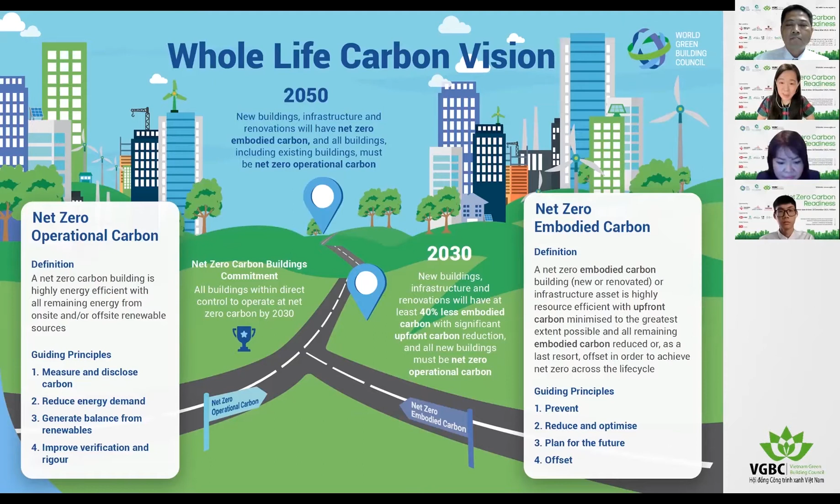We always knew that scientists told us this is not enough. That's why, this year around September, World Green Building Council published an enhanced commitment pathway by expanding its scope to recognize enhanced leadership action in tackling both operational carbon and embodied carbon emissions from the building and construction sector. In this new commitment signatory, we are requesting leading companies to commit to both operational carbon and embodied carbon as well, adding another layer of challenge to the industry.

We're also emphasizing that carbon offset should only be a last resort. You may take a moment to scan this QR code, which links to more information so you can consider whether your company is ready, or considering doing this pledge and becoming part of this global movement. By committing to this commitment signatory, your organization will also be recognized as a front runner under the global movement right after COP26.

There is a lot of recognition, and at the same time you will be exposed to all the global resources to guide you on how to achieve net zero and how we are able to support you further. In the next slide, we will see some interesting numbers. I'm very sure that after today's webinar, this number will start to grow.

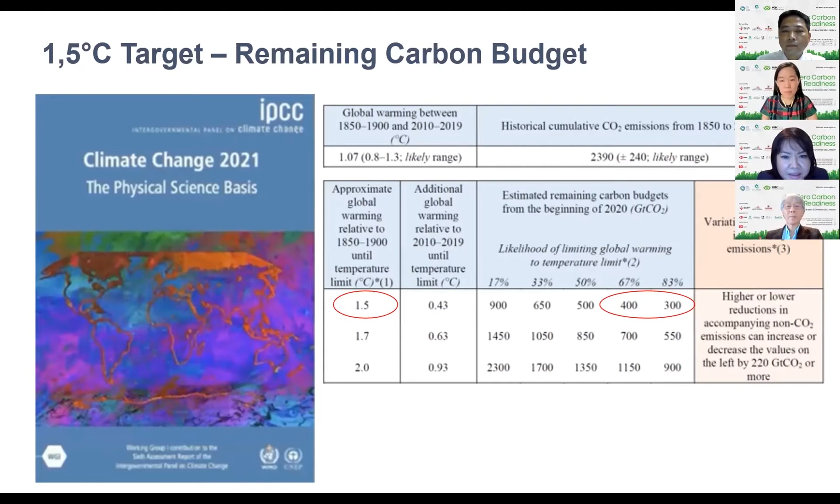Within this global picture, our construction sector's contribution comes from two parts: building operations, which are responsible for about 28% of the annual carbon emissions, and building material and construction, typically referred to as embodied carbon, which comes from manufacturing and processing of building materials and construction, contributing up to 11%. So the total, 28 plus 11%, means we contribute close to 40% of annual global CO2 emissions.

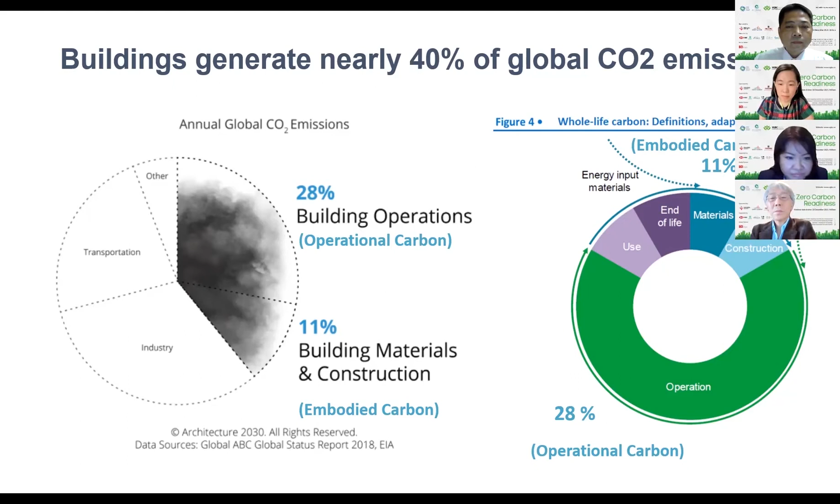As mentioned earlier, whole life carbon is described as operational and embodied carbon, and for the building sector to play a major role in supporting decarbonization, we need to address the whole life cycle impact of a building. A whole life net zero carbon emission building is therefore one whose carbon emissions from materials used, or embodied carbon, as well as operational carbon emissions, are offset. So what actions in particular can we do to offset these emissions? I will discuss in the next slide.

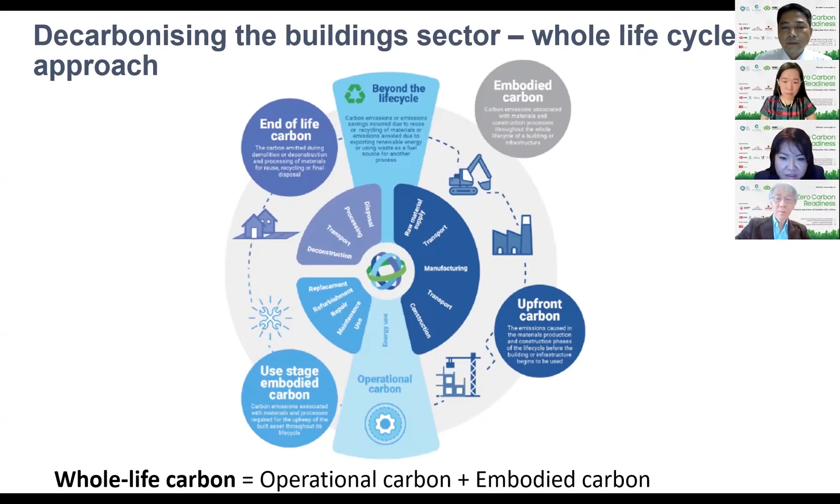For the operational stage, which is responsible for two-thirds of the sector's emissions, the definition of net zero implies a strong effort to increase energy efficiency first. Energy efficiency is the core driver to reduce operational emissions. A strategy to enhance energy efficiency is optimizing the building's thermal envelope so that heating and cooling energy can be reduced. This includes deep renovation for existing buildings, like adding more insulation to reduce energy consumption, or for new buildings, starting with design considerations for better design.

Secondly, electrification, which means no fossil fuel on site. It's not only climate friendly, but also healthier for occupants, safer, and cheaper. And thirdly, renewable energy - switching to renewable energy such as solar or wind energy. In the case of Vietnam, quite interestingly, in 2017 solar energy played almost no part in Vietnam's energy strategy. But by the end of 2019, Vietnam had surpassed Malaysia and Thailand to reach the largest installed capacity of solar panels in Southeast Asia. And after the commitment of our Prime Minister at COP26, we are seeing the race to wind energy starting to pick up. So hopefully we will have more supply of renewable resources in the future.

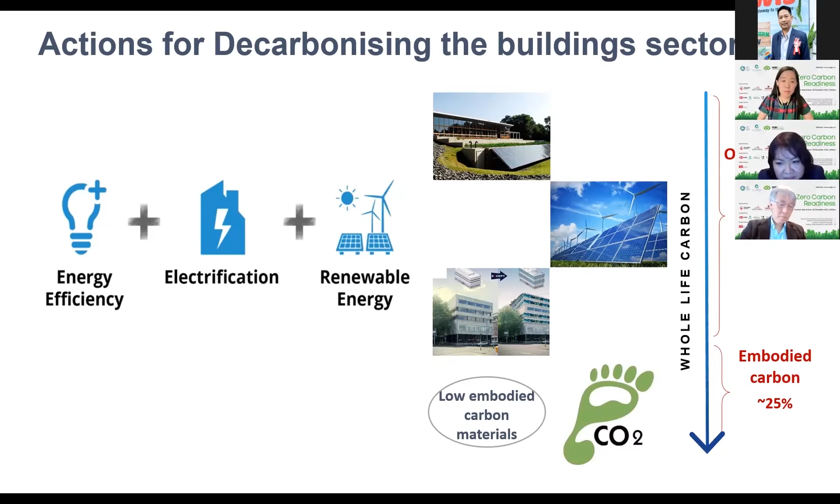So when we act on the whole life cycle of a building in two dimensions, operational carbon and embodied carbon, we could achieve full decarbonization of the sector. And of course, to do so, we need to start with transparency of data collection, increase data collection, disclosure of building performance, and then gradually apply the use of building labels and standards.

So for different types of buildings, there are several groups of actions recommended for existing buildings in order to reduce operational carbon emissions. Renovation is key, critical. So like I mentioned earlier, we need to enhance the building envelope, and thermal insulation will be crucial.

Prioritize preserving or extending lifetime by ensuring improved repair and refurbishment. Thirdly, increase the intensity of use of the building, meaning increase occupancy or utilization rate. We already see emerging sharing economy models like shared offices or Airbnb developing in this direction.

For new buildings, we can start with setting minimal energy efficiency and thermal performance requirements. In Vietnam, QCVN 09 stipulates the requirement for energy efficiency of buildings, encouraging them to perform better than the baseline. For new buildings, we can also start with design considerations like facade orientation, natural ventilation, green roofs, and other passive design schemes to reduce heating and cooling energy.

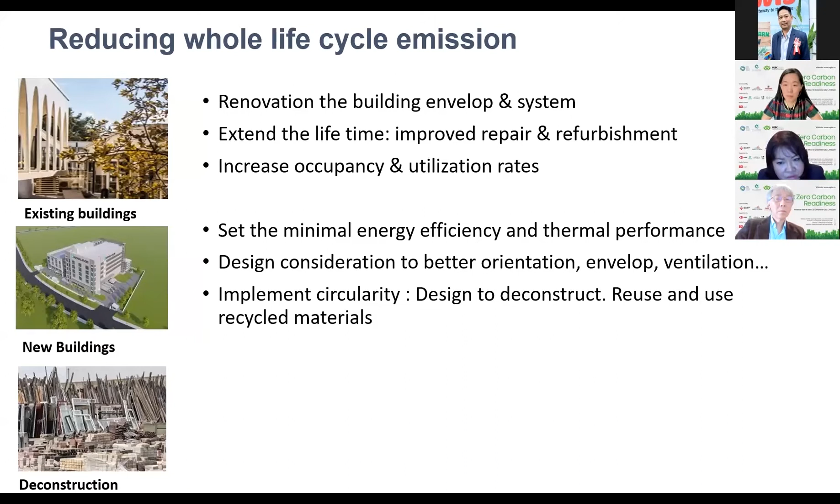To do so, a holistic approach from the early stage is important, with the mindset from the design stage: design to deconstruct, design to dismantle. If we can do so at the deconstruction stage, waste becomes a secondary resource. Circularity becomes a business model, and waste recycling service can be a business opportunity. This model requires consideration from the design stage—design to deconstruct or dismantle for reuse.

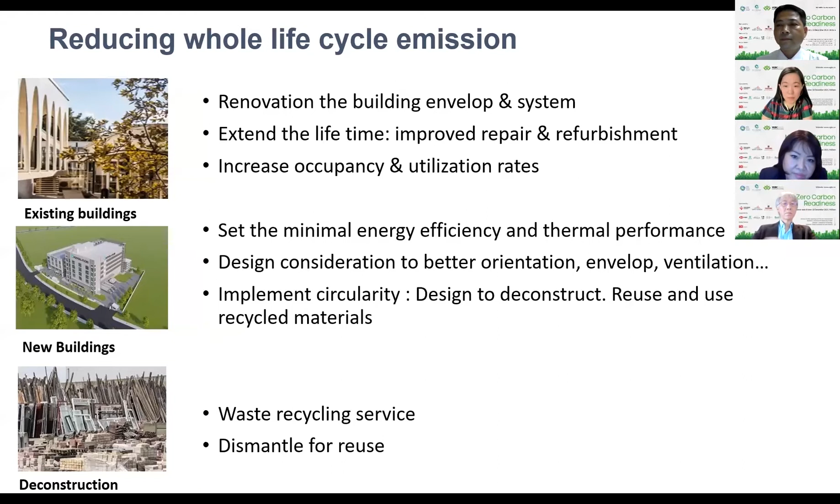So these are the groups of actions we recommend for each type of building state.

To talk about the legal framework, I want to share that in Vietnam we already have an existing legal framework, already integrated with energy efficiency aspects and ready for further improvement.

In March 2021, our Prime Minister issued a decision stipulating requirements for energy efficiency buildings. From June 2021, the Ministry of Construction issued the revised construction law, which encourages buildings to operate in energy efficiency mode and introduces an energy efficiency rating for building operation. This rating system is really on par with European countries, so I'm very happy to see this movement from the government.

Since we're talking about government legal framework and activities, I want to share updated results of the project on energy efficiency improvement in commercial and high-rise residential buildings in Vietnam. This project's executing partner is the Ministry of Construction, sponsored by UNDP, with a duration from 2016 to 2021, just finished last year.

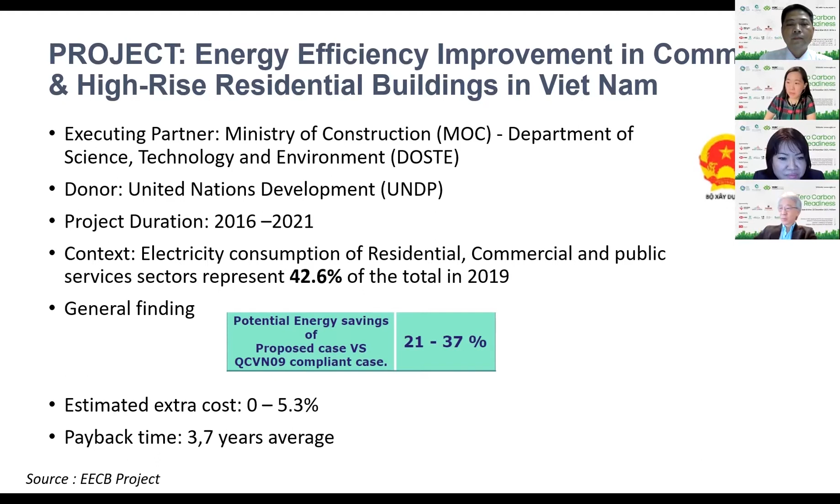The findings also show a lack of prerequisite input for the development of building energy efficiency in Vietnam. This can be addressed by the local green building scheme, as in my next slide.

As introduced earlier, Lotus is the voluntary green building scheme for Vietnam, developed by VGBC. Lotus has 8 categories, in which the energy category accounts for 32 points, or 32% of total score. Our approach focuses heavily on energy efficiency, requiring projects to comply with all mandatory requirements included in QCVN09. Lotus is also the only green scheme in Vietnam that is deeply integrated with Vietnam's building regulations.

The prerequisites for Lotus projects include measuring total building energy use, designing through passive design, and demonstrating energy efficiency of minimum 10% improvement from the baseline. From there, an additional 1 point is given for every 2.5% reduction of energy use from the baseline, up to 45% improvement, which can gain a total of 14 points.

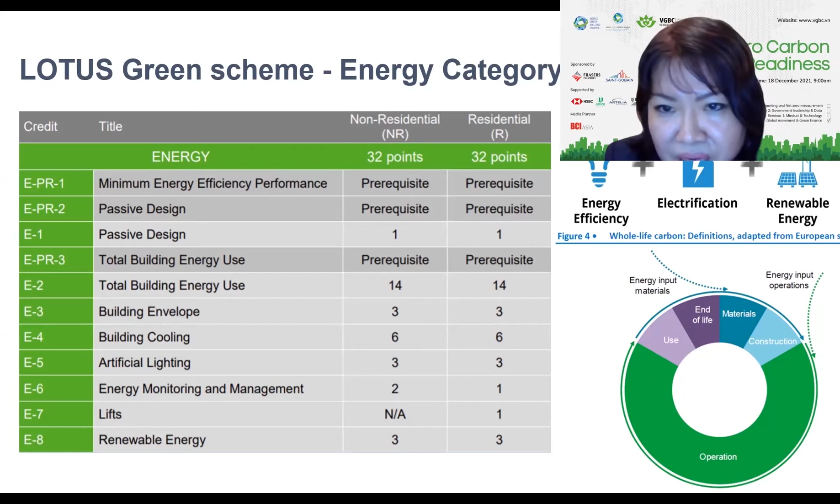And beside that, there's an additional point for other credit like building envelope, ventilation, air conditioning and interior lighting, etc. Last but not least is points for renewable energy, up to 3 points. So we can see very clearly that the point system in Lotus energy credit covers all 3 key actions in operational carbon, which are energy efficiency, electrification, and renewable energy.

Next, please. So talk about material and embodied carbon. The material and resource category of Lotus includes 3 main goals: first is to reduce the amount of virgin natural resources, second is to promote the use of low embodied material, and third is to reduce the amount of waste generated. To achieve these goals, credit within this category encourages the reuse and recycling of building material from sustainable sources, and unbaked material. For example, Vietnam has a regulation to use lightweight material to replace burnt brick.

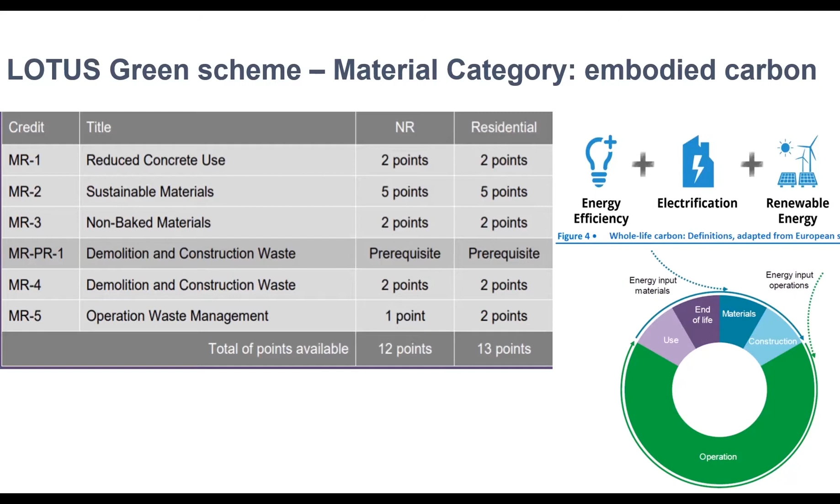Next, please. So here is a case study of environmental impact of one Lotus platinum project. This is the Green One UN house. This project has 77% of landscape area that limits the heat island effect, and 35% of total green roof.

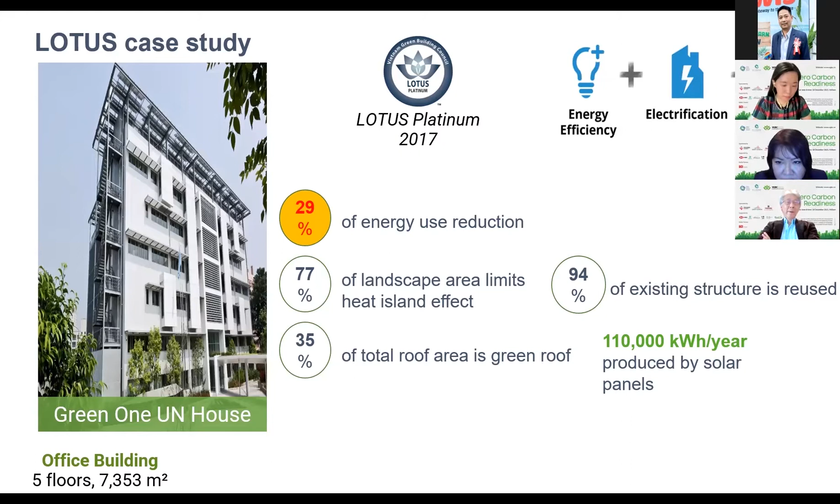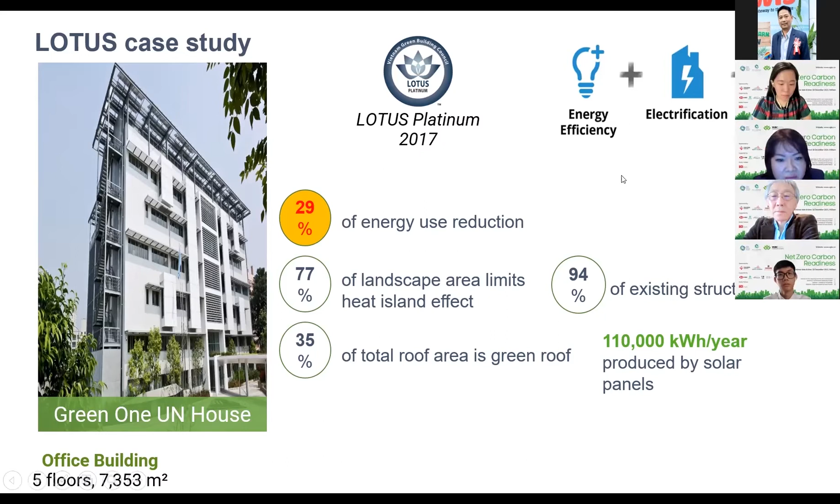And beside the choice of MEP system, those design features contribute up to the reduction of 29% of energy use for the building per year. And beside that, for the embodied carbon, they use 94% of the existing structure as reused material to reduce the embodied carbon.

So to summarize, to achieve the global warming limit of 1.5 degrees above the pre-industrial level, we will need to cut down our carbon emissions by half by 2030 and continue on the progress to maintain our carbon emission budget within the limit of 400 gigatons. And in this global picture, our building sector contributes close to 40% of emissions that come from two parts, the embodied and operational carbon.

And we need to address the whole life cycle impact of a building to address the decarbonization target. There are three groups of actions that allow us to do so, which are energy efficiency, electrification, and renewable energy, in which energy efficiency is the starting point and can save up to 37% of energy use. And Vietnam already has mandatory regulation in this regard. Applying green building schemes like Lotus will help all stakeholders from the early design stage to consider the right strategy from the beginning and have a holistic approach to decarbonize their building.

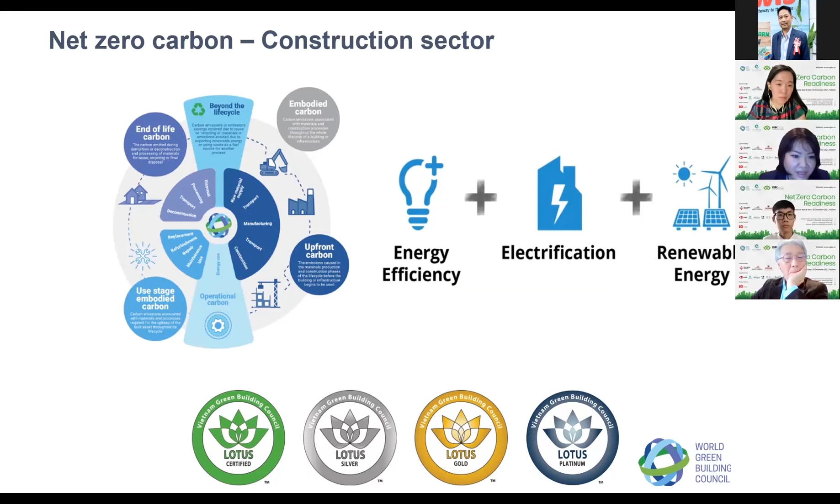Next slide, please. So that's it from me, and please join us in creating green buildings for everyone, everywhere. Thank you.

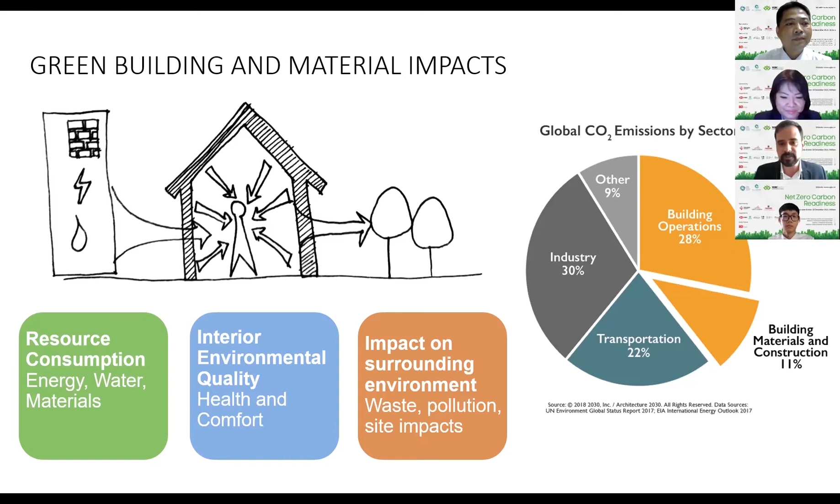Ms. Hang also mentioned about the contribution of buildings to global CO2 emissions, but I just wanted to mention that green building is not only about decarbonization. Decarbonization fits into the goal of reducing impacts from resource consumption, but green building is also about interior environmental quality and how buildings interact and impact on the surrounding environment. So while we will be focusing on resource consumption, it's important to note, as Mr. Carrie Chen also mentioned, that there are other goals we need to balance in the building sector for green building as we embark on this journey.

Ms. Hang also mentioned about the various types of building that Lotus can apply to. We are focusing on new construction in particular now, but I wanted to point out that for interior projects and buildings in operation as well, Lotus has tools to assess how green these types of projects are, existing buildings and interiors. These are also important parts of the decarbonization goal, but today we'll focus on new construction.

This is similar to what Ms. Hang said, but energy is the most point-heavy category and most important category in Lotus at this stage. I want to show you how we look at energy and materials and resources in a Lotus project.

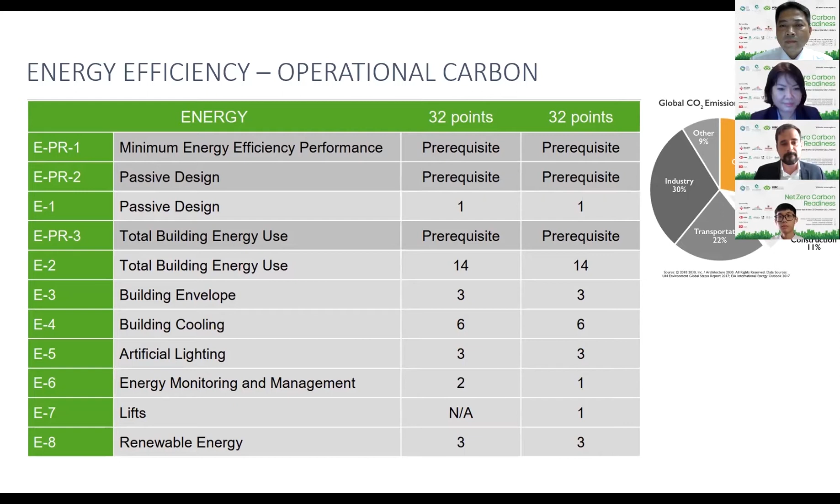Lotus also has an exceptional performance category, which allows for innovative ideas and strategies to be applied to projects which may not be well known yet, and it's also open to giving points for that.

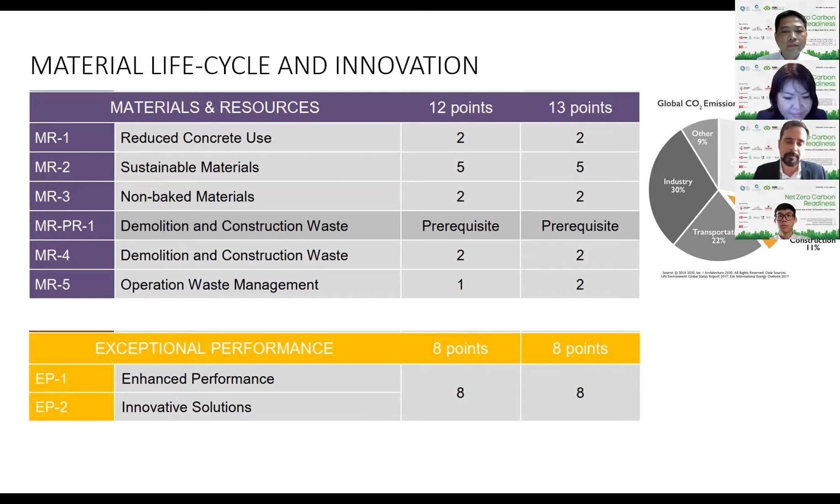I want to have a look at four main tools that we have available already that Lotus encourages us to look at as we approach a building project and work on making it green. These we can apply in Vietnam already, and I think Lotus is a good way to be guided through the process to decarbonize a project by using tools such as this.

The first is integrated design. Integrated design is about getting together all parties from the project team early on in the design stage. This may seem like an obvious approach, but too often in building projects, the project is run by one party and doesn't benefit from synergies by getting different professionals and stakeholders in the project to sit down, share the same goals about sustainability, and look at how they can work together to achieve those goals in terms of building performance and other green building goals. This is a process that can really bring significant benefits through a design process in achieving green building.

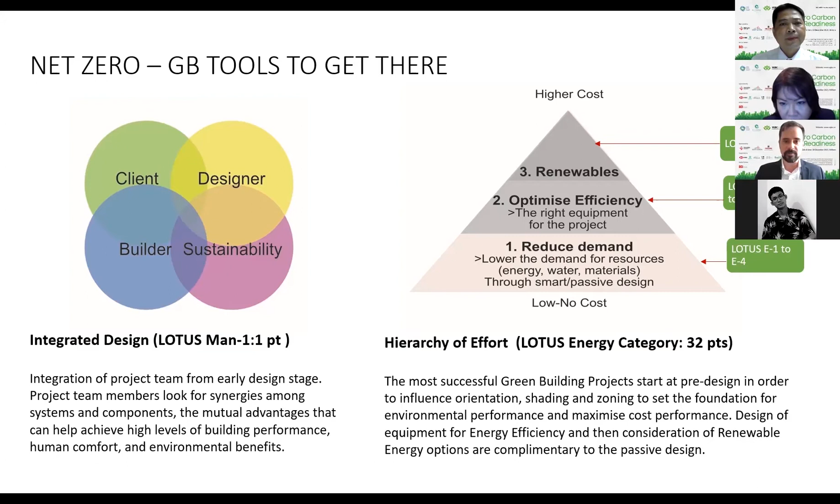When we look through a project by these steps, we can find solutions that won't increase the construction cost too much and also bring the best results in terms of a green building project.

In terms of more technical tools, I think energy simulation is a great tool that we have available. In Vietnam, we have quite a few professionals now using this in the green building consulting sector. Software-based energy simulation allows us, at the design stage, to predict the energy consumption of the project, and it can do this quite accurately as long as inputs are reasonably known.

By using this software, we can compare different options at a very early stage in design and get a good indication of which energy efficiency strategies are going to give the best impact, and even compare the cost of these in order to optimize the results before construction even begins. I think this tool is very helpful for a project owner to understand, before the building comes to be, what the energy consumption and operational energy are going to look like.

The fourth tool is software-based whole building lifecycle analysis. This ties into the materials and resources category that Ms. Hung mentioned in Lotus, but it can also be awarded an innovation point since it's not in the Lotus tool yet. These tools are available for Vietnam, and we are seeing some consultants start to use them, and we are starting to use them in our consulting as well.

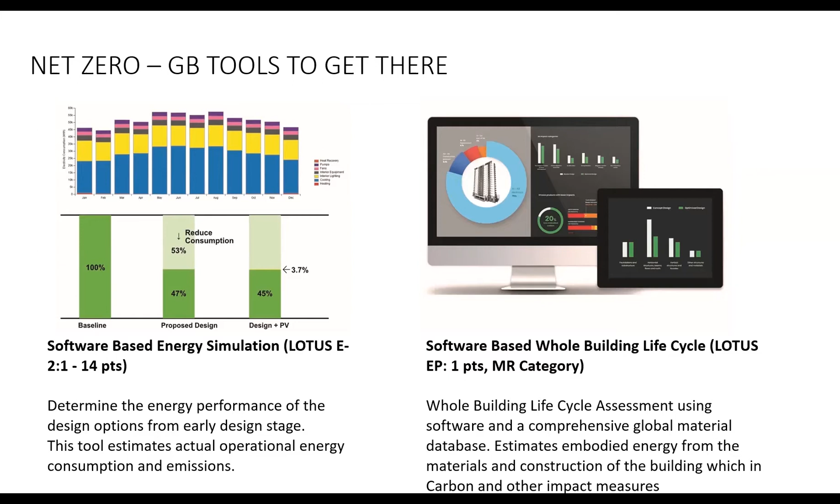With quite comprehensive global databases of materials and a software system, we are able to estimate and compare options for different structural and material strategies for projects, taking into account the carbon at each stage of the life cycle of the material, but also of the building as well. This is something that's starting to gain traction in other countries around the world, and I think in Vietnam, as we improve our energy efficiency, we'll start to look more at whole building life cycle through software such as these.

Yeah, next slide, please.

There's one software called One-Click LCA, which has a tool called Planetary, and VGBC is actually partnering with Planetary. One-Click LCA has offered this tool, which is like a basic embodied carbon assessment tool, and it's free for use. You can find it from the One-Click LCA platform or even from the VGBC website. So we can see that we're starting to move towards looking at embodied carbon even in Vietnam.

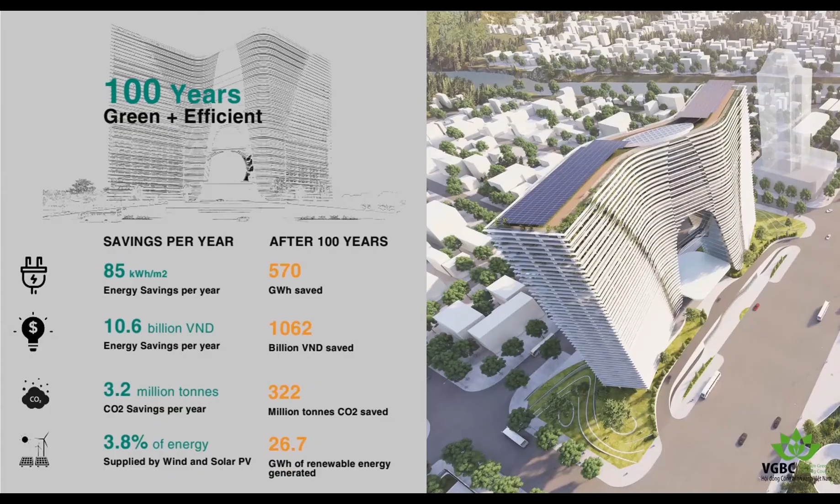The site for this project is a long, narrow site facing a river, and the orientation is probably one of the worst we could have for starting a green building project. North is straight up for this project, and once you apply the required setbacks for this site and the construction area and the GFA, there's not much room to move in terms of the building shape. So we looked at the OTTV credit in Lotus.

We had a look at if we just made a basic volume for the building, what would be the overall thermal transfer for different options, and we tried to adjust them and check the Lotus result to see what would be the best footprint and volume for the building. If we just did a straight block building facing east-west, the OTTV there's actually a 23% increase above the baseline. As we started to twist the building a little bit, we could improve, and by trying to avoid direct east-west facing facades, we were able to reduce the thermal transfer—the heat gain from direct solar radiation—by 7% according to Lotus, before applying shading. So that was the first step for this project. Next slide, please.

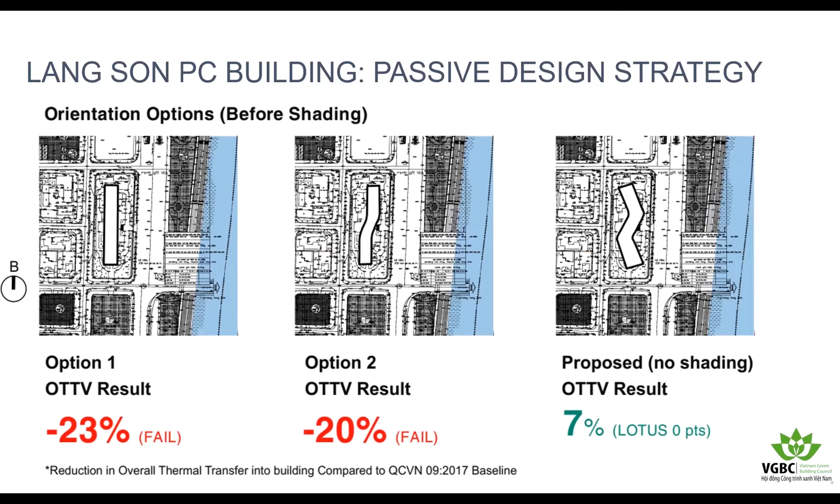Next, we look at the shading strategy, also based on Lotus OTTV methodology. We could see that by applying shading on northwest to northeast or southeast, southwest facing facades, we could reduce solar radiation by quite a lot.

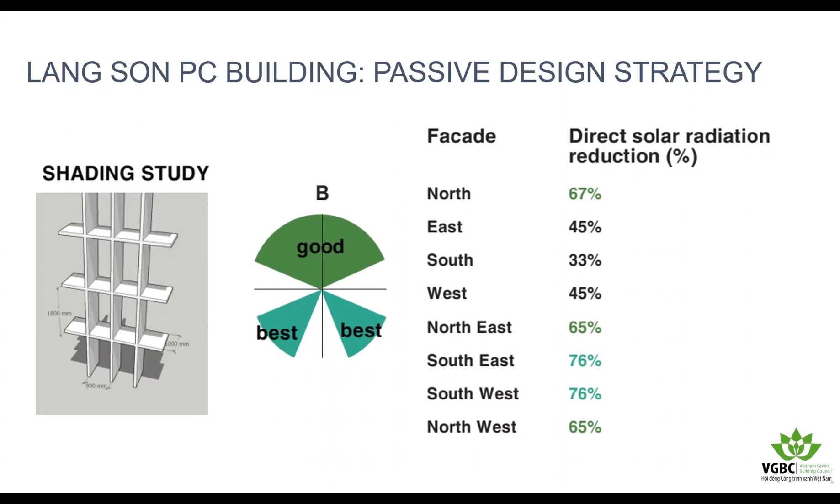In applying this, we were able to improve the OTTV reduction result in Lotus, which is an indication of the reduction of the solar heat gain, the direct solar radiation, by 48%, which is the maximum point in that credit for Lotus.

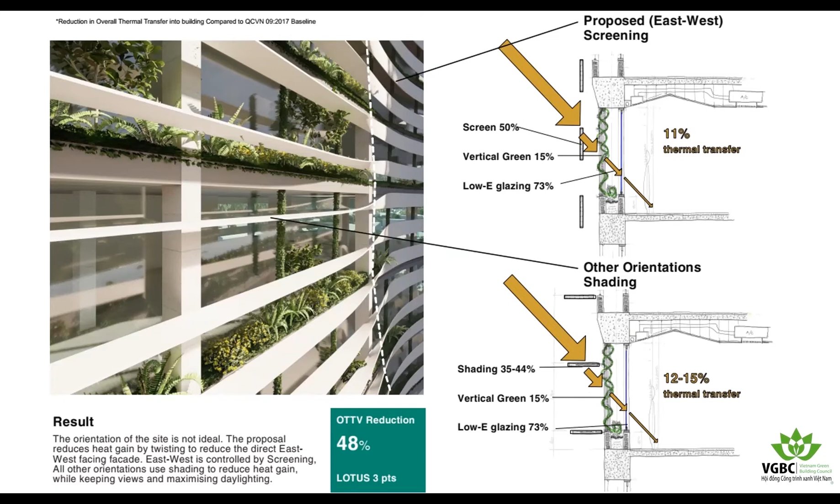So you can see that this process also influenced the whole design of the facade and the concept for this project. I think that was one of the exciting things for us in applying passive design to this project.

We also looked at the efficiency of equipment, and in combination with the passive design, we're looking at a 45% reduction in energy consumption for this building and getting 28 points in the energy category for Lotus. We estimate that the project will use 105 kilowatt hours per meter squared for its energy use intensity.

And all of this, we are trying to use low-tech solutions first and not use too many high-tech solutions in order to save on the investment cost.

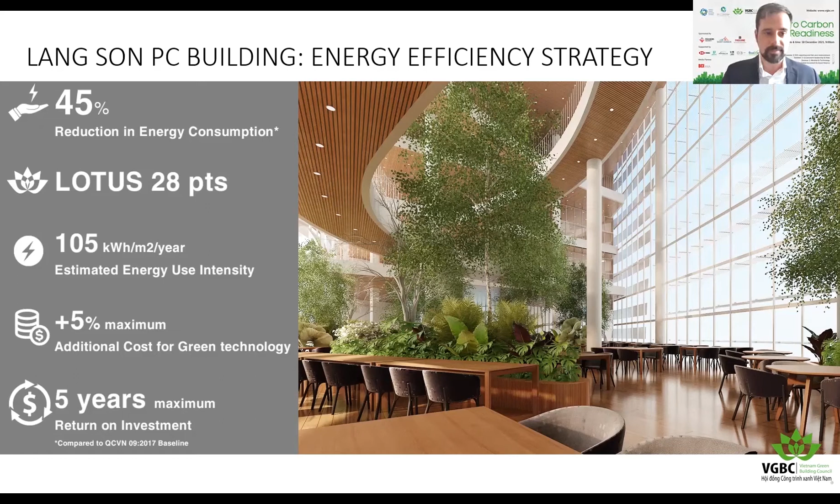We also looked at renewable energy after this, and looked at how much renewable energy we can provide from the rooftop, based on quite a significant solar array for this 25-story building. We estimate that we can generate about 2.8% of the total energy consumption of the building from solar panels on the roof.

So while this is not so much in Lotus, we can still get some points for this. And I think it's quite typical of high-rise buildings where it's difficult to get a lot of on-site energy.

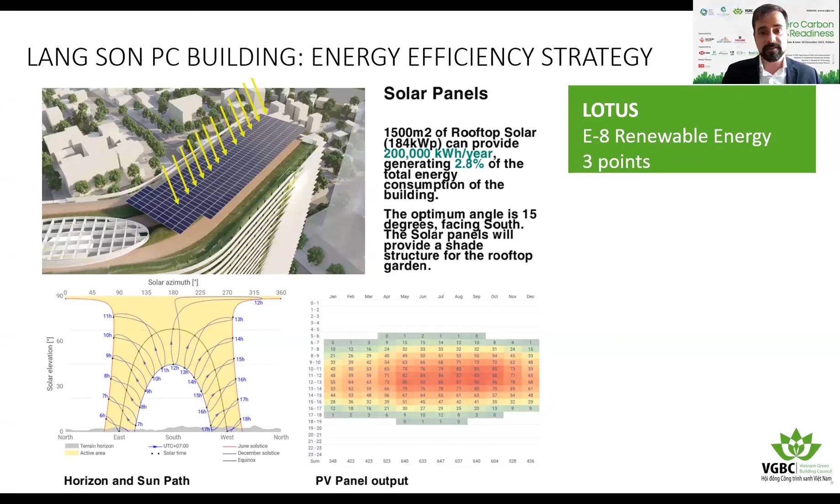We also considered using a design which has this archway, oriented towards the southeast summer winds and northwest winter winds, using this space to include some wind turbines to generate some wind power.

This may also only provide a very small amount of energy, but over the lifetime of the building will be significant.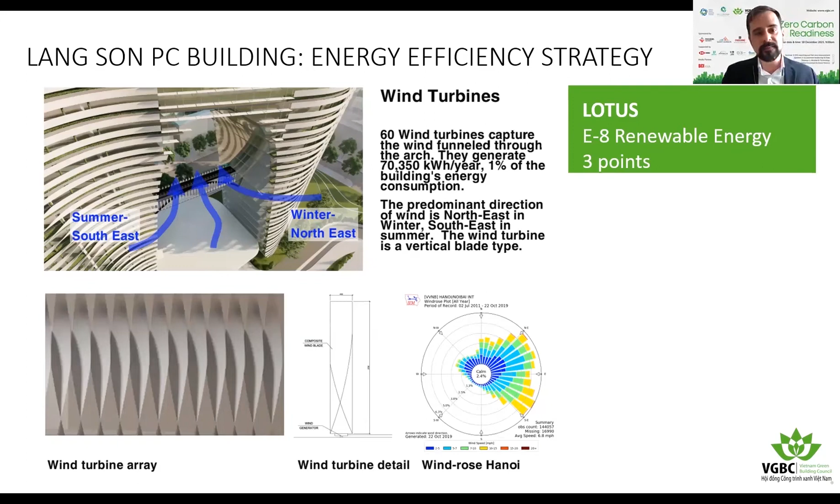This building is not able to achieve net zero by on-site renewable generation. But at the beginning of this year, we also wanted to look at theoretically, what would be possible for a net zero building in Vietnam.

And we've been wanting to see if anybody is interested in doing a net zero project. So we put together some diagrams for this, and looking at our existing projects, we made some estimates about net zero.

Obviously, for a high-rise building, it's quite difficult to achieve net zero with on-site renewables. But if we can get very highly energy efficient buildings up to about 4 stories, we think that in Hanoi and Ho Chi Minh City, by applying solar panels to the roof and covering some of the walls, we can get quite a high level of renewable energy generation, and theoretically it's possible to get net zero buildings.

And actually we have one project in the south which is anticipated to become a net zero building. It hasn't started construction yet, but it's a 2-story building. We hope to see some projects that can demonstrate that net zero is possible in Vietnam in the near future.

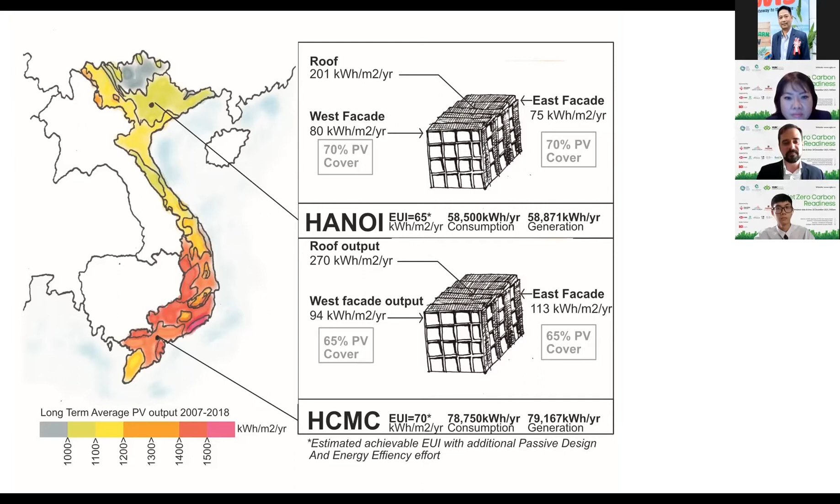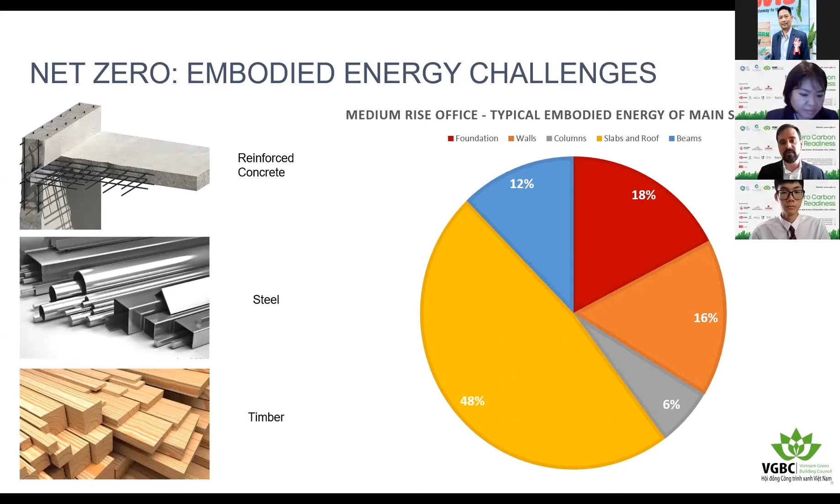And in Vietnam, as in many countries, reinforced concrete is one of the biggest contributors to this. So I think in Vietnam, we need to look at more options for materials and structural systems in order to decarbonize the embodied carbon, to look at the embodied carbon of our projects.

So it's quite difficult to make significant changes to the structural systems. However, in Vietnam, there is one particular strategy which has been identified to reduce embodied carbon for building projects, and that is by not using fired clay bricks, as Ms. Hang mentioned. In one project in central Vietnam, a factory project, we looked at the impact of replacing red brick with concrete block, and the overall embodied carbon for this project was reduced by over 10% by just making this one material replacement. So there are opportunities to improve embodied carbon even by simple material substitutions.

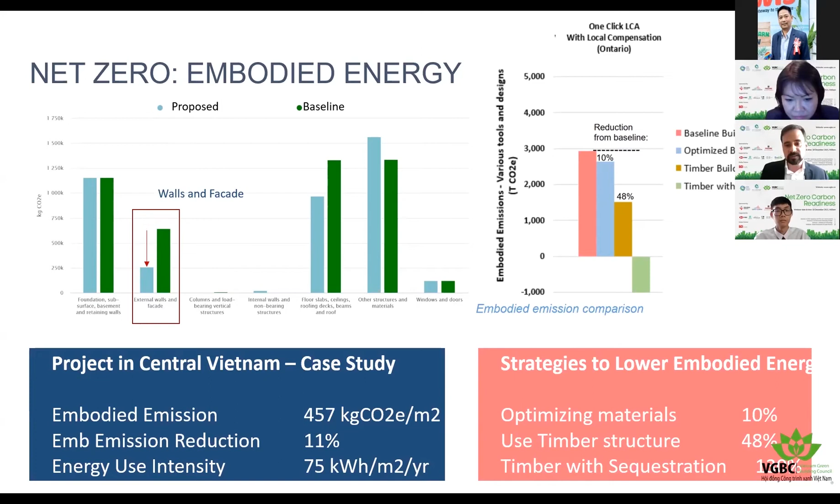But in order to make further reductions, we really need to look at structural systems, including steel, reuse of structures, as Ms. Hang mentioned, like the Green One UN House, and even timber construction with sequestration, in order to really address the embodied carbon of projects. Next slide, please.

I think we're running out of time, so I just want to mention briefly that concrete is one part that Lotus addresses, and there are many ways through structural efficiency, but also replacement of certain parts of concrete where we can save quite a lot of the carbon due to concrete construction. Next slide.

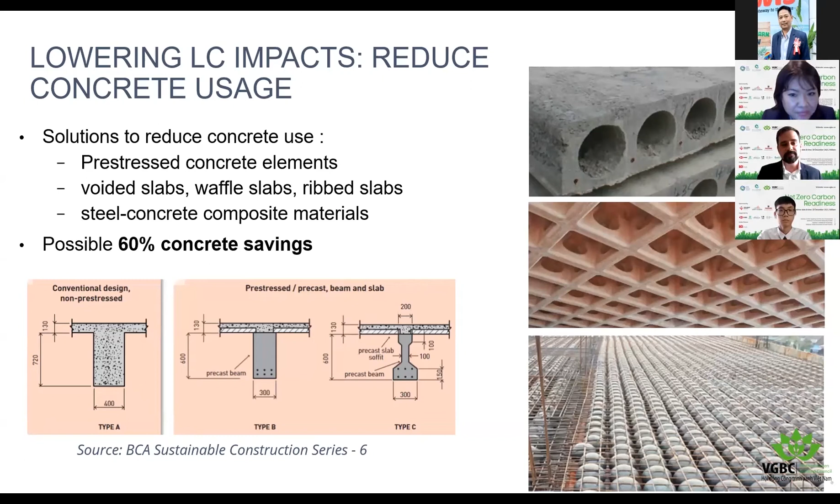But I think the global movements in mass timber and cross-laminated timber could be quite interesting for our region. It may take a while to be built in Vietnam, but I've also learned that Vietnam actually manufactures some parts of the panel using some industrial bamboo materials that can be integrated into these mass timber products. So we actually have some production in Vietnam of some of these materials, but we are yet to see projects in Vietnam that apply these new systems of construction, which have the opportunity to decarbonize the materials in our projects. Next slide, please.

Thank you very much for your time, and I look forward to the upcoming discussion in case there are any questions. Thank you very much.

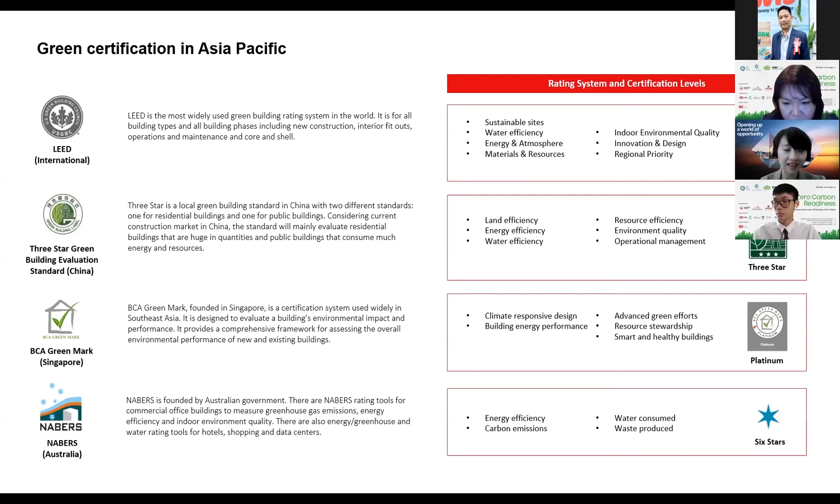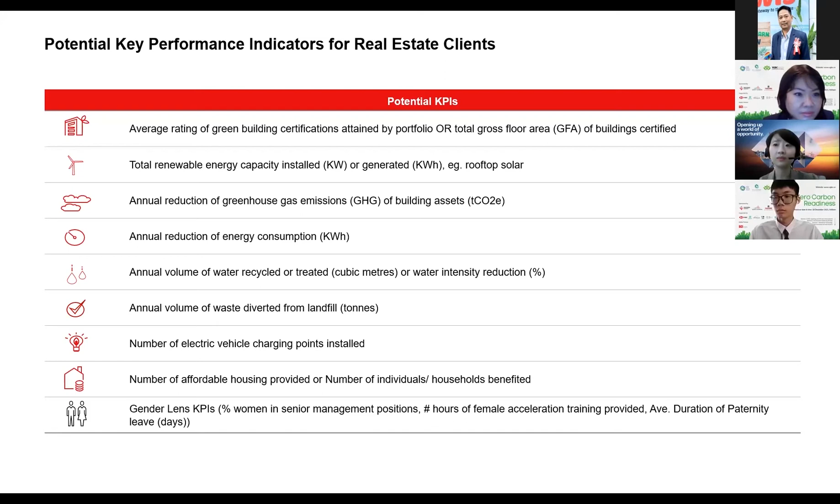GRESB is actually the database - an international organization that provides data and benchmarks for companies to compare their performance on the ESG front with their peers. So if your company or project has international investors, it's very likely you will receive their questions on ESG performance of the property, which aligns with this GRESB database and benchmark.

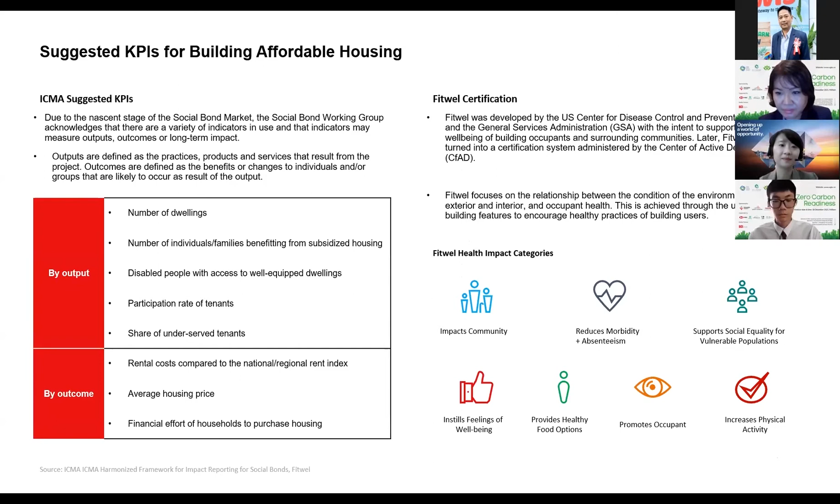I'm cautious of time, so I'd like to touch upon two case studies we've done recently. Most notably, we assisted Vinpearl to issue $425 million of exchangeable sustainable bonds, offering by Vinpearl into the shares of Vingroup. HSBC was the sole sustainability structuring bank, and we worked closely with Vingroup in developing its sustainable finance framework that received a positive second-party opinion from Sustainalytics. That is actually the first global exchangeable sustainable bond, and a very key milestone for Asian corporates in demonstrating commitment to sustainable financing. So if you wonder whether a first global sustainable finance deal can happen in Vietnam, here's one - and HSBC is keen to bring more such first sustainability finance transactions to Vietnam.

Next slide, please. The other transaction, which we are currently at the closing stage of, is a US $200 million refinancing of a LEED Gold certified commercial building. This transaction is part of a Vietnamese client's plan to include more quality properties in its investment portfolio, and it's the first green loan transaction for that client. The transaction opens up a new funding channel for the client and reflects HSBC's strategy to onboard and support like-minded customers. With that, I'm ending my presentation here, and I'm now handing back over to the MC.